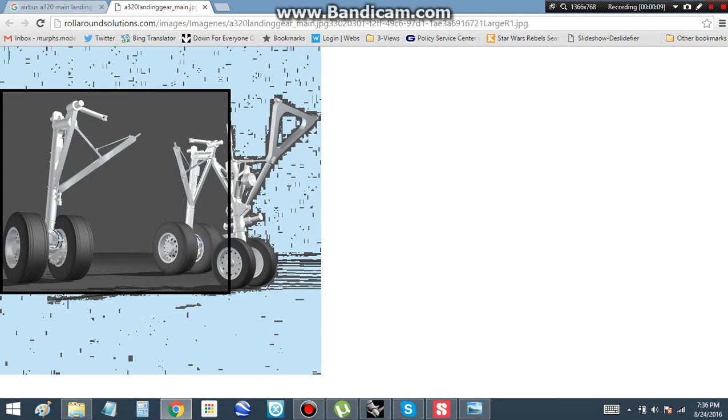Alright, we're trying to figure out what the actual landing gear angle is, because if we look at this one picture, it looks kind of angled back. But if I look at Airbus pictures, it looks like pretty much it goes every direction it wants to.

Somebody forgot a step. A lot of things that go wrong with landing gear.

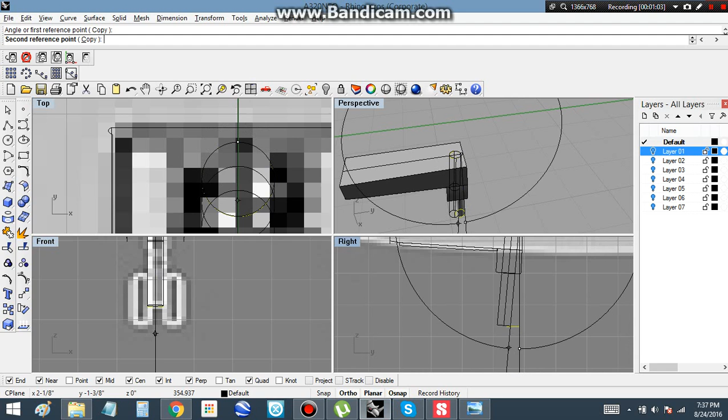Okay, I'm gonna say it does angle back a little. So we're gonna take this and rotate it back a little. Pretty much, I'm gonna say perpendicular with those doors.

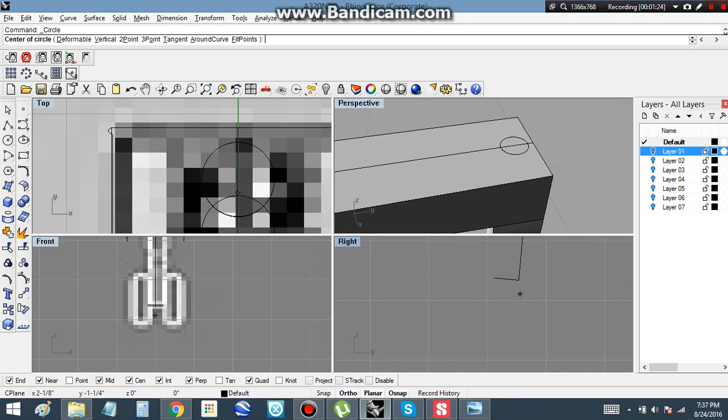Select that, trim it off, and then remember, this is what we did the last time. This is basically just a repeat of what we did with the main gear, and smaller, because nose gear is smaller.

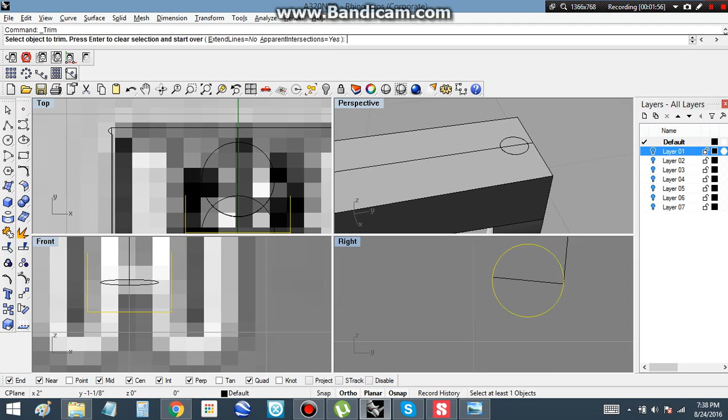I don't like putting too much detail because the tiny parts are very hard to build. So I'm just going to have a quick look at the nose gear here.

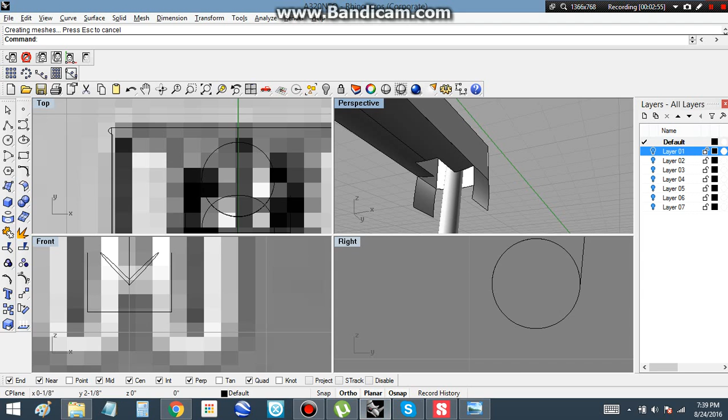It looks like, alright, it's got this weird triangular part at the top. So in order to recreate that, we're going to go back to when the landing gear was level.

Sometimes you do this. You do one thing, you think, yeah, maybe I will add a little more detail. Doing this right now because when I do angle it back, everything will work out.

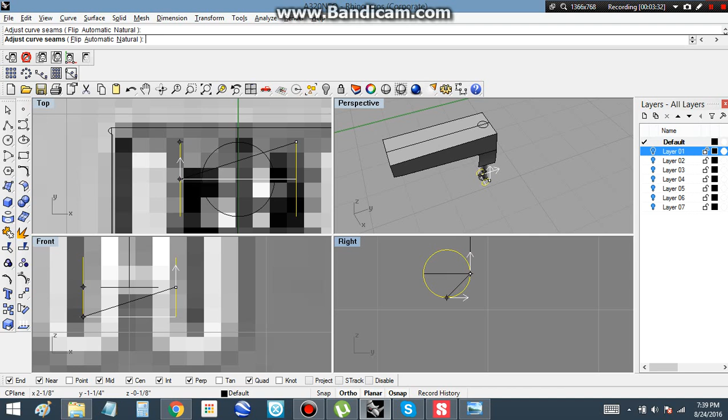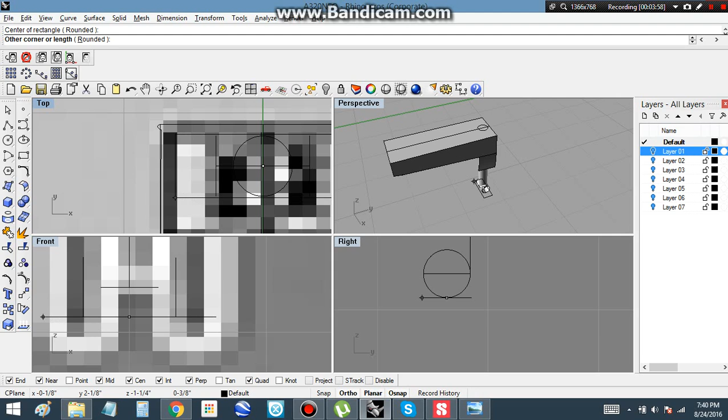Okay, now grab our rectangle from the center, take it to about here, just slightly larger than the circle. Press R for rounded corners, and wham!

Of course, you grab the bottom of the thing, so drag it up to here, just slightly past the level of the plane, or level of the fuselage thing. Take this, draw a line, trim.

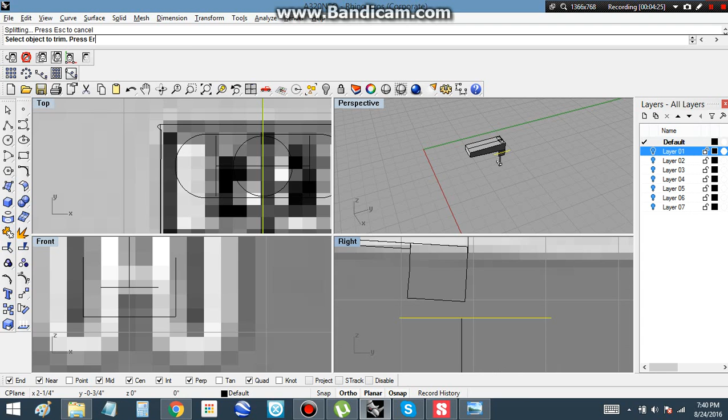Now what that does is that deletes, cuts the main strut. Loft, grab that edge and our square, and make sure these lines are even. And there we have a weird little V thing.

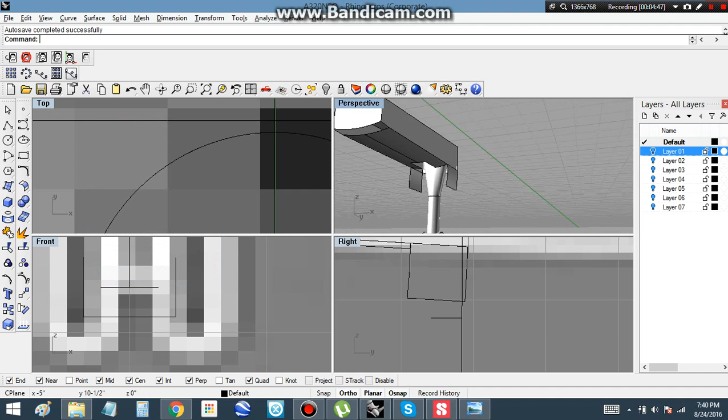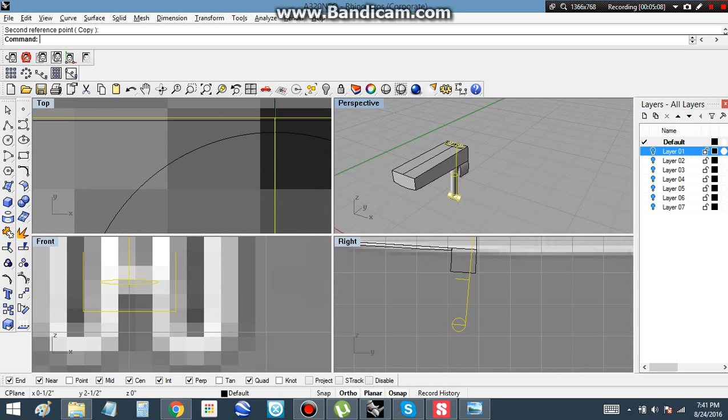Now we're going to take it, just going to grab anywhere and do our little rotation again. I had Shift key pushed to turn off ortho. Select, trim, and kiss it goodbye.

And then for that one strut, figure out where that goes. Is it a V strut or just a single strut? I'd rather it were a single. Okay, single strut.

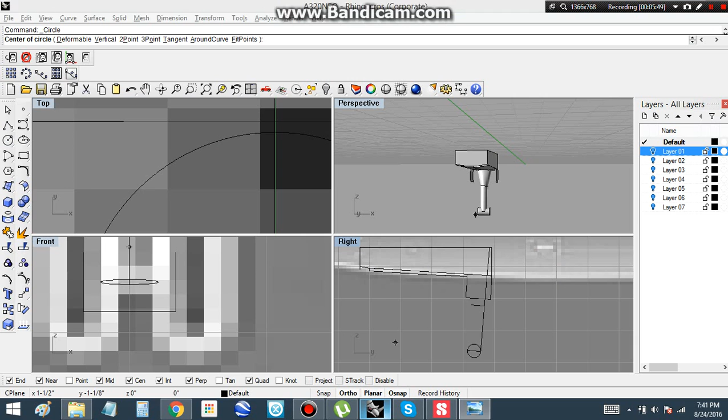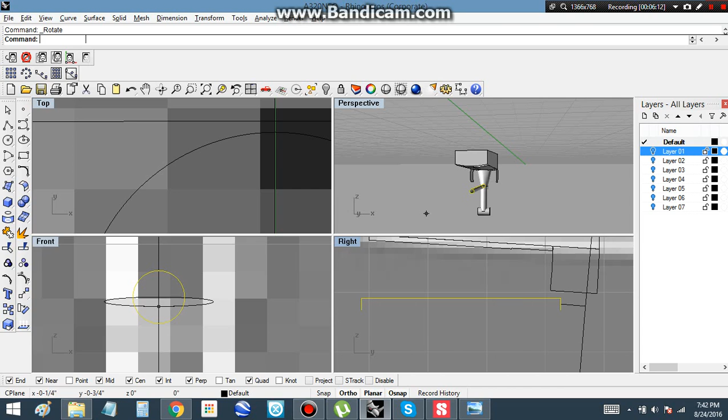And it looks like it connects right at the bottom of the V, or where this thing starts. Make it smaller. Extrude it. I always make sure the seam line is at the top for these.

Grab right there at the bottom. And then this is another one of those just line it up visually things. Look at the, kind of perfect. So we select both these parts, trim.

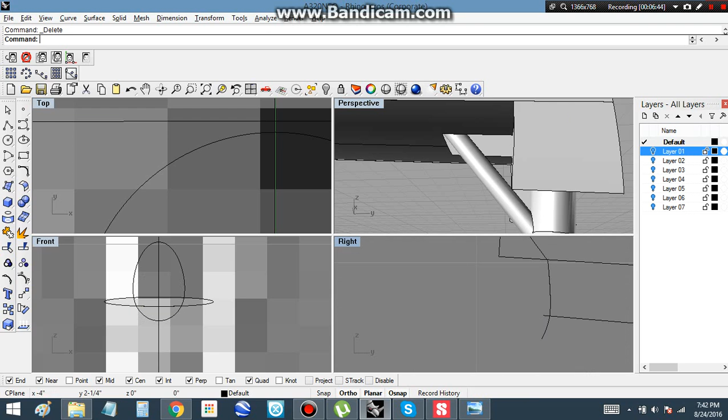And click, and that makes that so that it lines up. Click that, trim, and good night. And that is our nose gear.

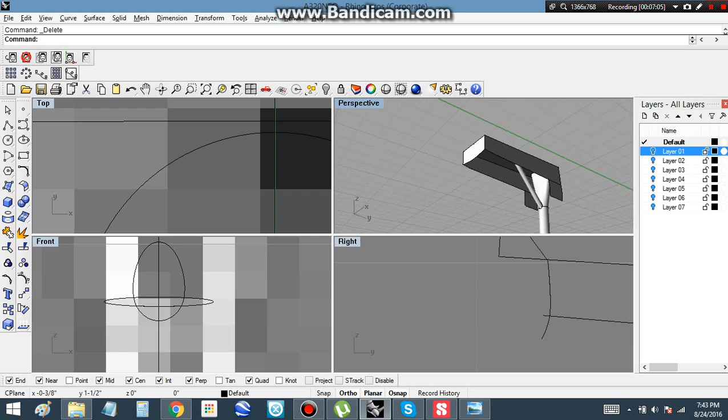Okay, and then we're just gonna, for the wheels, we're gonna do the same thing we did before. And I forgot to trim it. So, select, trim, good night.

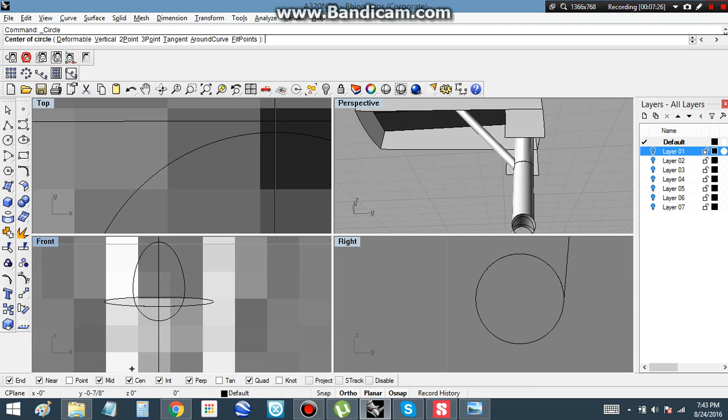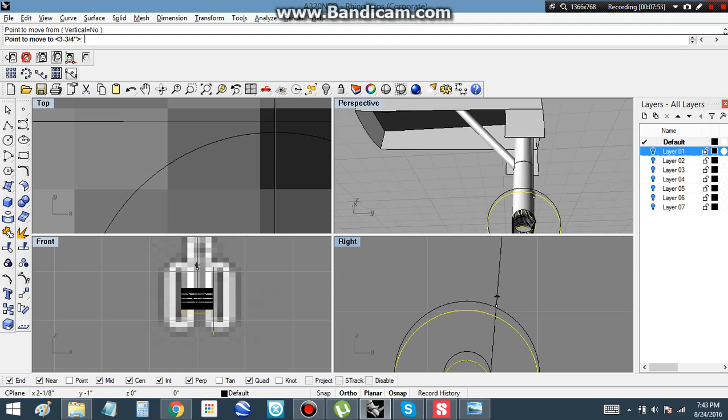Alright. Make sure your center is on. Grab that. Now, see, as you notice, we're actually a little long here. So what we're going to do, we're going to grab that, click move, click anywhere along here, and just drag it up following the line until we're right where we need to be.

And then we're going to select this again, trim, and get rid of extra parts. That gives us our proper length for our nose gear.

And now we find pictures of nose gear and try and determine what they look like. As you can tell, most at 1/100, this stuff's going to be invisible. So, I don't know what I clicked there.

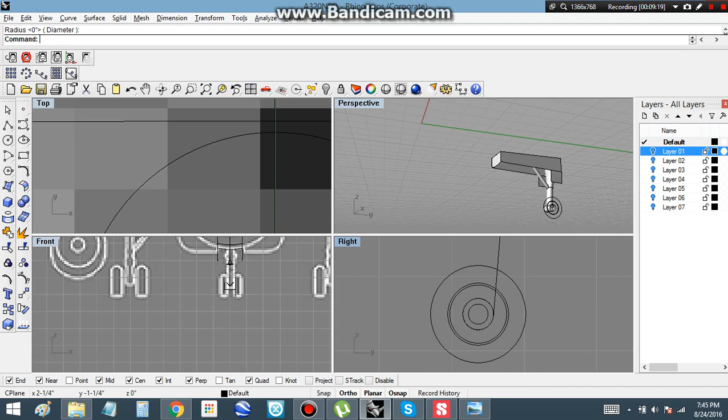I'm just going to represent it by doing that. Select, planar, and basically this is the exact same thing we did with the main gear. Drag out, loft it, mirror it, and then change it to the landing gear. And that's it for the landing gear.

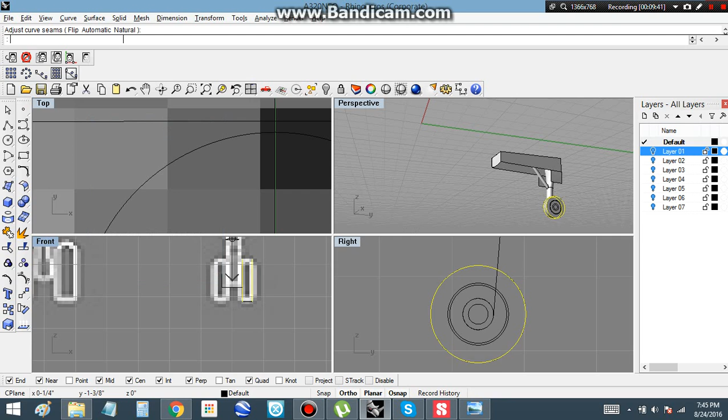So, next thing we're going to do after this, since we have the entire plane pretty much done...